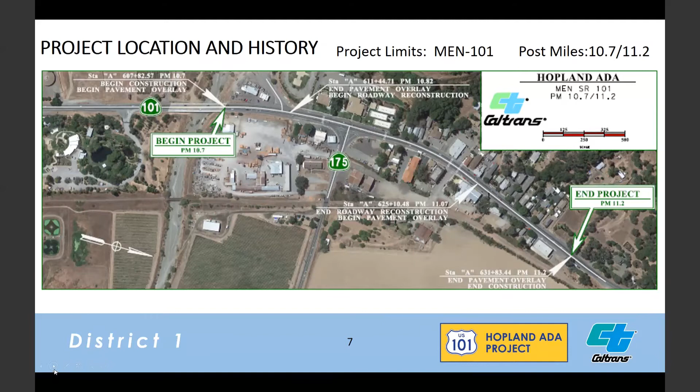The purpose and need of this project is to upgrade existing ADA pedestrian facilities to meet current standards and achieve ADA pedestrian compliance. Additionally, upgrade the following items to good condition: fair roadway pavement, aging signage, transportation management system, and drainage. Construction cost for this project is around $10.8 million.

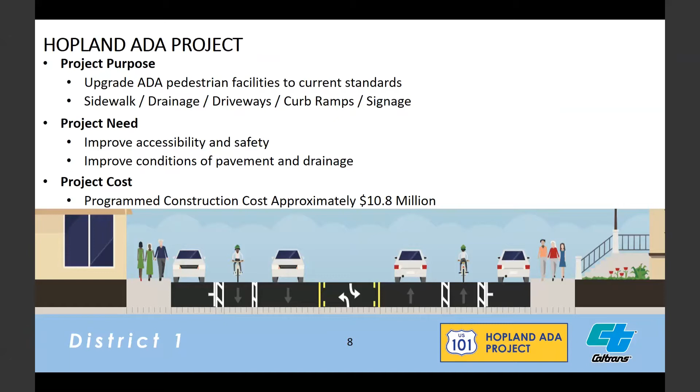And I'll hand it now to the design team. Please, George. Thank you. Hi everyone, my name is George Tokmakov. I'm the design senior with Caltrans North Region for the Hopland ADA project.

This slide shows the proposed street view of the project from Mountain House Road to First Street. As you can see, numbers 1 through 5 show: number 1, sidewalk will be 5 to 8 feet wide; number 2, parallel parking and shoulders will be 8 feet wide; number 3, bike lanes will be 5 feet wide; numbers 4 and 5, traffic lanes and the two-way left turn lane will be 11 feet wide.

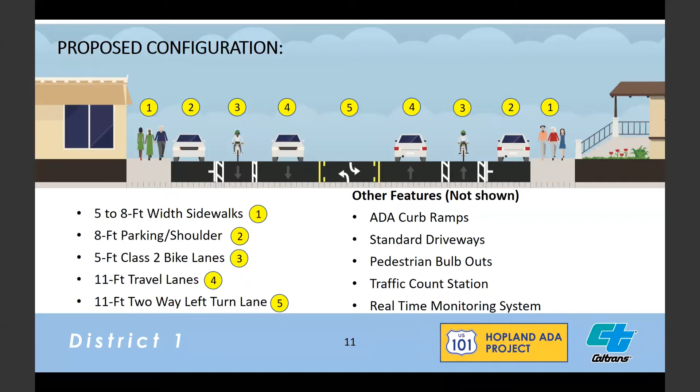The sidewalk improvements, street parallel parking, and bike lanes will help create foot traffic for businesses in the area. In addition, the following improvements will be made: ADA curb ramps, standard driveways, bulb outs, traffic count station, and real-time monitoring system.

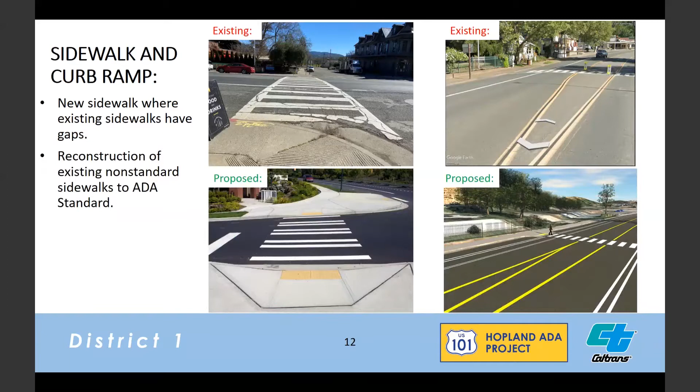Here are some photos of places in town you're very familiar with, where there are no accessible sidewalks, no curb ramps, or curb ramps that are not to standard. Here you can see a couple of renderings of standard curb ramps and crossings. The top one is the existing, and the bottom one is proposed.

Bulb outs will be designed to help shorten the distance pedestrians will have to travel to cross the streets. Bulb outs will also help drivers see pedestrians using the crosswalk so they can reduce their speed. The crosswalk slopes will be flattened and brought to ADA standards.

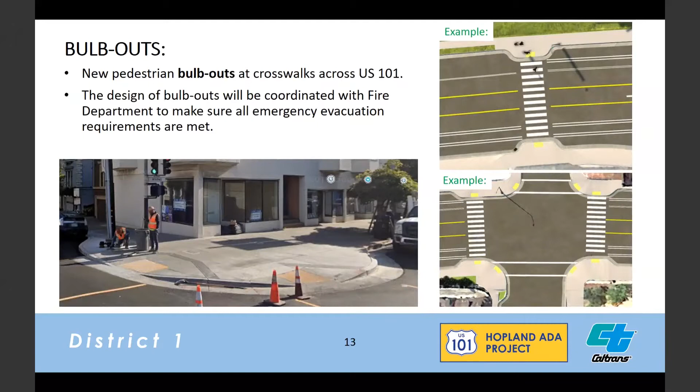Here are some shots of drainage inlets and localized flooding in Hopland downtown that need improvements. Upgrading the drainage facilities will help prevent curbside flooding. Underground culverts will be improved to provide more efficient drainage, and new inlets will allow water to be drained without causing debris blockage.

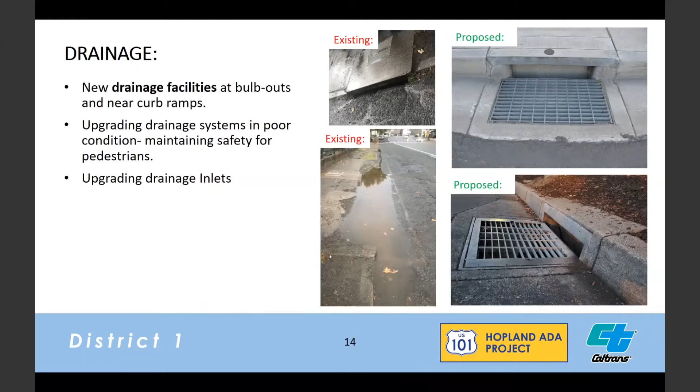Here's the construction strategy. The section identified on the map in purple shows full depth roadway reconstruction between Mountain House Road and First Street. This will include correcting the roadway profile and bank.

These corrections will improve safety at the crossing and crosswalks. The section identified on the map in yellow will have pavement overlay to provide a smooth roadway surface.

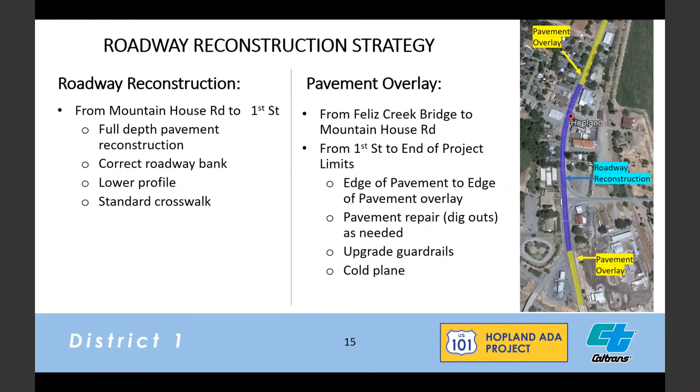Next slide. And next up is Jeff Wright from construction.

You're muted, Jeff. Sorry, I must have hit it twice. I thought I was unmuted.

Good evening, I'm Jeffrey Wright. I'm the area construction engineer for Mendocino County for Caltrans, and I'm here to present the construction portion of this presentation.

Next slide, please. During construction we anticipate various challenges, and we're proposing solutions to those challenges. Some of the challenges we've identified are community concerns regarding construction impacts to local businesses and residences.

There will be impacts to businesses and pedestrian access for businesses and local residences. We will have ADA constricted areas that we'll need to pay attention to, and the existing road grade has a steep side slope.

We will also have a restricted work sequence that will help facilitate minimal disruption to parking for the local businesses and residences. We'll have a community outreach plan and schedule coordination.

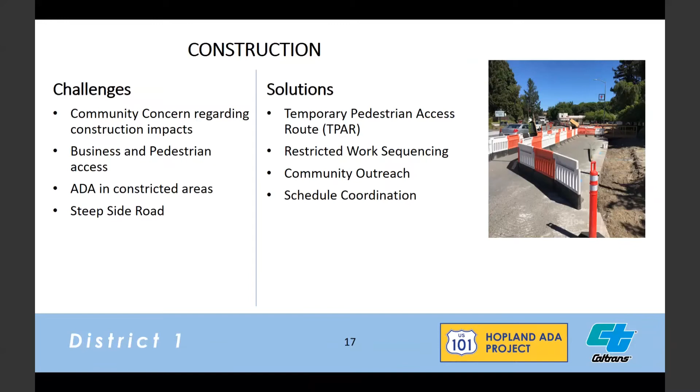Next slide, please. The estimated construction start date will be spring of 2025, as Mike mentioned earlier.

It's anticipated that the approximate duration for the project will be between 6 and 9 months of construction, although it will have the potential, if we run into unforeseen conditions, to roll over into a subsequent year.

We also anticipate there'll be traffic control throughout the life of the project consisting of various types: either reversing traffic control with flaggers, or lane reduction to facilitate traffic flowing both directions by utilizing the center turn lane as a traffic lane.

We'll have moving lane closures for striping and marker application on the final pavement lifts, and then we'll have shoulder closures and sidewalk closures to facilitate the various sidewalk and curb ramp improvements.

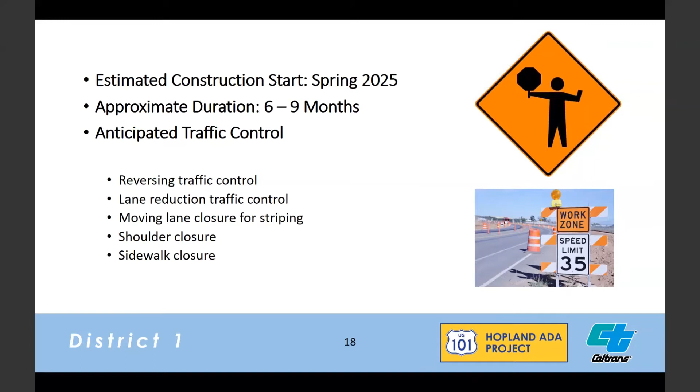Next slide, please. The temporary pedestrian access routes, as we touched on, will allow for planning of mobile access ramps. We're planning on constructing mobile access ramps to access businesses and residences while the sidewalk is removed and replaced.

As you can see in these photos from the town of Willits, we had the temporary pedestrian access routes with the white and orange barriers as shown.

And then the wooden gangplank as shown in the right photo will be a temporary access over the active work area, built from the temporary pedestrian access route to the business front or home front or walkway as required.

We will be addressing pedestrian accesses by using these types of structures, and we will also cordon off the area of active construction with these temporary pedestrian access routes to facilitate construction vehicle access for equipment and concrete trucks.

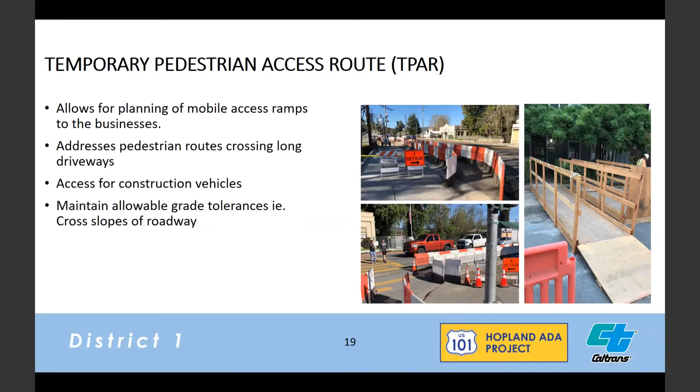We'll also maintain allowable grade tolerances for cross slopes of these facilities to comply with ADA.

Next slide, please. We will have a restricted work sequencing, and this is a hypothetical example crafted to show what we intend to do. We'll be limiting the work area of the contractor into sequences and stages, and we will have TPAR and parking for these various sections.

The project will be broken up into segments. As you can see, we've delineated different colors in 1, 2, and 3, and these would be proposed stages 1, 2, and 3 to progress through town.

We would allow the contractor to work on 2 sidewalks that are adjacent for efficiency of their construction, and catty corner as shown in red. Then we would skip a block as shown in blue and green, or 1 or 2 blocks depending upon the side of the street.

And then we would allow another catty corner block to be constructed. This would be done in sequencing, so they would do all the red first, then all the blue next, and all the green after that. The contractor schedule would dictate how many consecutive blocks they have open.

The intent is to limit the disruption to the public and the businesses by allowing parking to occur in the unworked-on blocks, and hopefully only have a block or two maximum walking distance to get to the respective businesses that are impacted by the active construction.

We will avoid working in adjacent segments, and we'll have advanced coordination from the field team to the local business owners and residents.

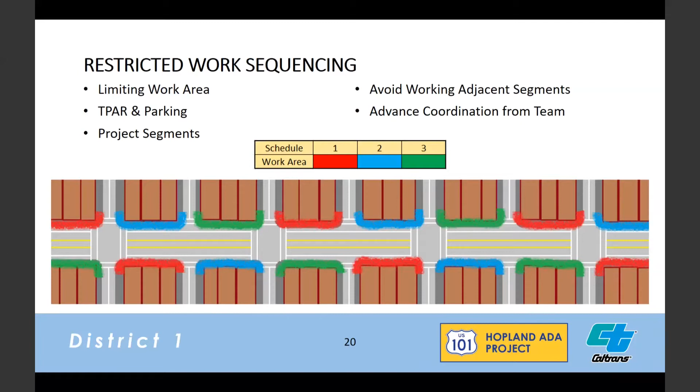We will also try to improve communication with the community by having a community outreach plan. We know that we will have a pre-construction open house meeting where we'll put all the plans on the walls so the community can come and see what the proposed improvements are and ask questions of the Caltrans team, so they can have a better understanding of what we're doing at each individual location in town. Throughout the life of the project, we'll have social media updates and flyers posted around town to try to give increased communication with the community.

We'll also have an advanced notification system where a member of the Caltrans team and contractor's team will contact local businesses 48 hours in advance. We'll work with scheduling and conveying that to the public. In advance of the project, we'll have right-of-way coordination for the affected properties and businesses that will have sidewalk built in front of their facility.

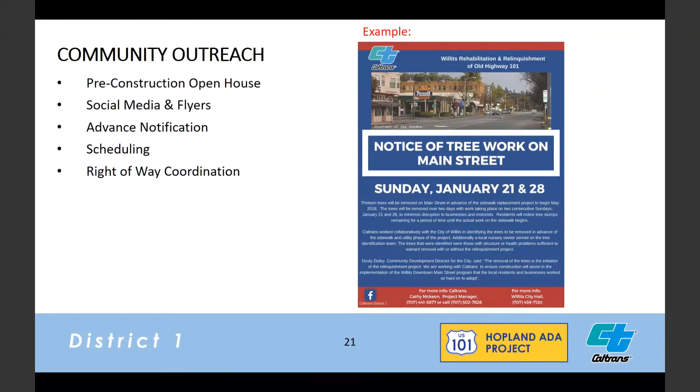As mentioned, we will have schedule coordination and provide advance notification to affected businesses and residences. We will have door-to-door notification and outreach from the Caltrans lead inspector and the contractor's foreman. The intent is to have them visit each individual residence and business a minimum of 48 hours in advance of the work occurring in front of their business.

We will endeavor to develop interpersonal relationships and accountability between the Caltrans and contractor's team and the local business owners and residence owners. We'll also have a 24-hour contact telephone number where you can leave a message with any concerns or questions you may have. And we will try to post ongoing 3-week schedule updates via social media or other formats to keep people apprised of what the upcoming work will be.

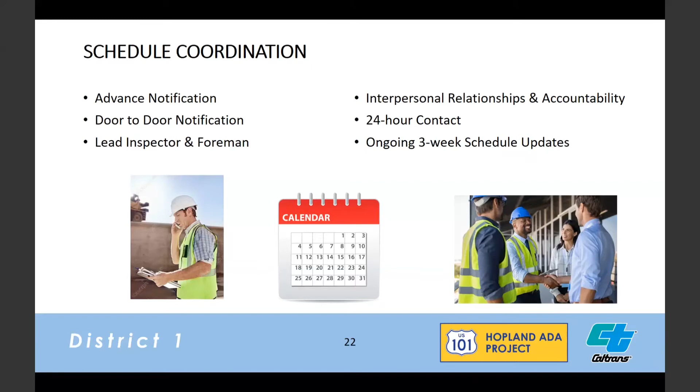We know that emergency evacuation and traffic safety is of paramount importance to Caltrans and to the community. So as part of the contract, we will work with the contractors and local emergency services to develop an emergency evacuation plan, coordinated so that in the event we have active traffic control going on when an emergency occurs, we will know how to respond and open up the highway just as soon as feasible.

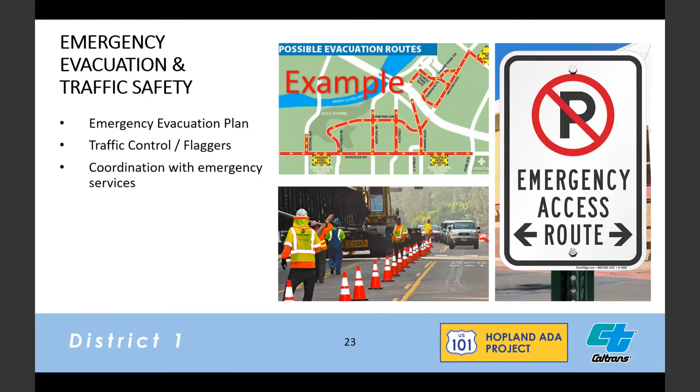We will educate traffic control and flaggers that if there's an emergency vehicle coming into the queue, it will have priority, and they'll stop all other traffic to facilitate the passage of those emergency vehicles. We'll have advanced coordination with all the individual emergency services, whether it be fire department, sheriff's office, or medical ambulance services, etc.

Next, I'll pass the presentation off to Julie Price, the environmental coordinator for the project. Thank you.

We've prepared a draft environmental document and circulated it for public comment. The comment period ends on May 4th, and at that point we will review the comments received along with any additional information, and prepare a final environmental document. We anticipate the final environmental document will be approved by the end of June. After that, the project can move on to other phases and ultimately to construction. Environmental involvement continues during construction, where we monitor construction activities for compliance with the environmental measures that are part of the project.

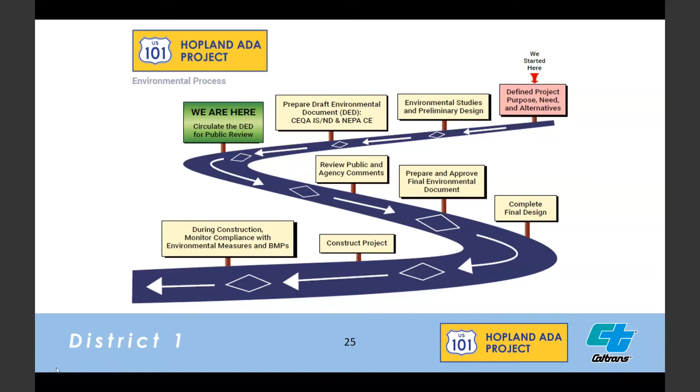In accordance with the California Environmental Quality Act, CEQA, and the National Environmental Policy Act, NEPA, the project needs to go through an environmental review process to evaluate potential impacts to the environment. The analysis of these impacts is included in the environmental document; it is, in fact, the core of that document. Under CEQA, the type of document prepared for this project is an initial study with negative declaration. Under NEPA, the project qualifies for a categorical exclusion.

The CEQA, or state environmental review process, for the Hopland ADA project has found that the project would have no significant impacts on the environment, and therefore no mitigation is required. The NEPA, or federal review process, will be completed at the time of the final environmental document.

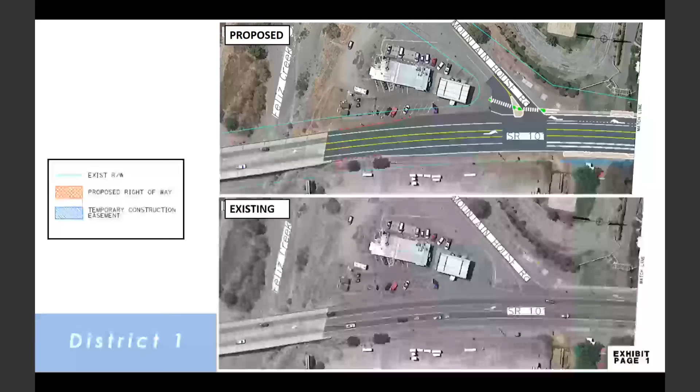Right, yeah, we're at the Hopland Tap, so a lot of people pull down Center Street and park behind the building and come in the back way. So I'm kind of wondering what the impact on Center Street is, or will that be part of the repavement project?

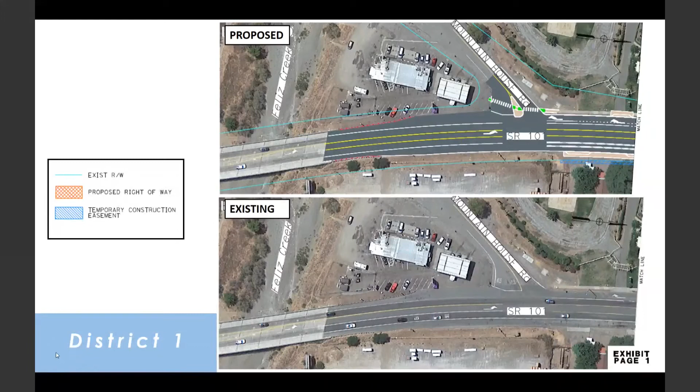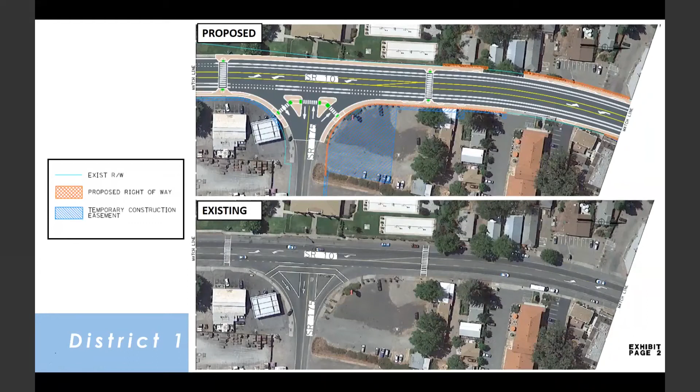So as part of the project, all of the pavement through town from Feliz Creek Bridge to just north of First Street will be paved at some point throughout the project. Right now we're still in the staging development part of the project, and then the contractor will have their own spin as to what they address first, whether they do all the sidewalk work first, all the pavement work first, or some combination thereof.

But at some point, Center Street will have some intermittent obstructions to allow the paving to occur. We will have temporary pedestrian accesses in front of your building while we are doing the sidewalk, curb ramp, and bulb-out improvements in those areas, so parking while we're actively working on that sidewalk section in front of your business will be impacted to facilitate construction.

But as we tried to talk about in a hypothetical example earlier, hopefully the adjacent block on either side will not be worked on at the same time as the block in front of your building. So they'll be able to park hopefully no more than a block away and walk back to your business, utilizing the temporary pedestrian access route and the gangplank as may or may not be appropriate for your situation to access your business front.

Any parking you have in the back of your building should be able to be maintained, because Center Street will be open for the majority of the construction, but there will be some necessary temporary closures while the paving goes on, for the duration of the paving activity, until that pavement is cool.

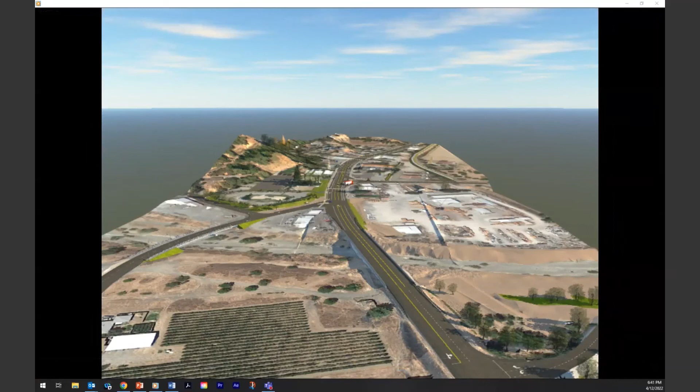Hi everyone, my name is Shaq. I'm the lead designer for this project.

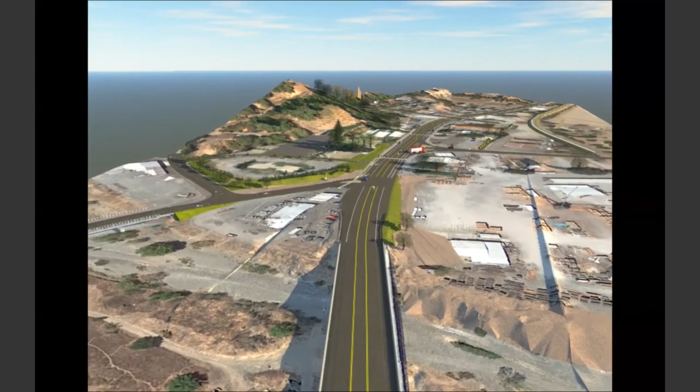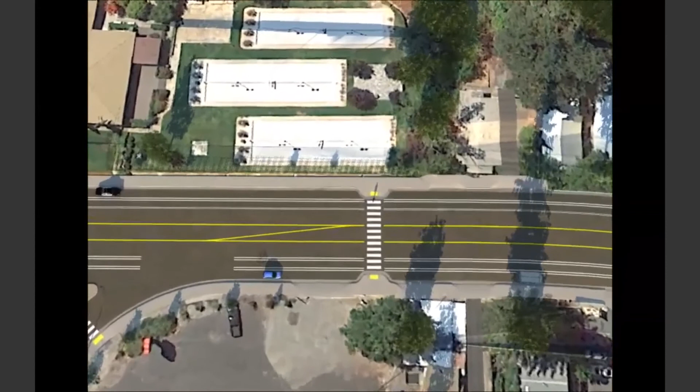This is a fly-through view of the project. It shows right at the mountain house where we are proposing to have some type of island to reduce the crosswalk distance. This area shows the 175 intersection. We are proposing to install an island to reduce the crosswalk distance. We also installed a bulb out to reduce the distance.

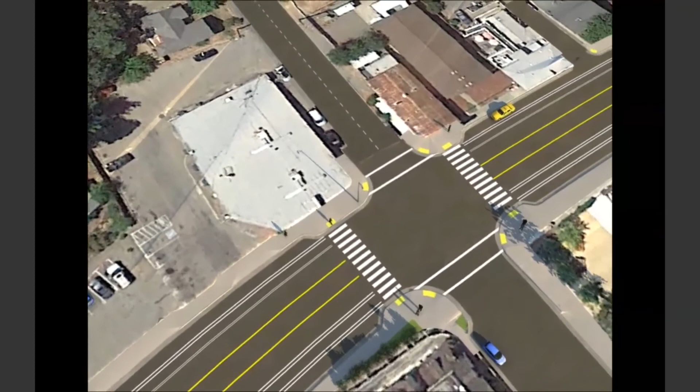This is the area where we have the 175 intersection. Throughout this portion would be more the overlay portion of the project. However, we are making the sidewalk ADA compliant, so we will work on the sidewalk in that stretch.

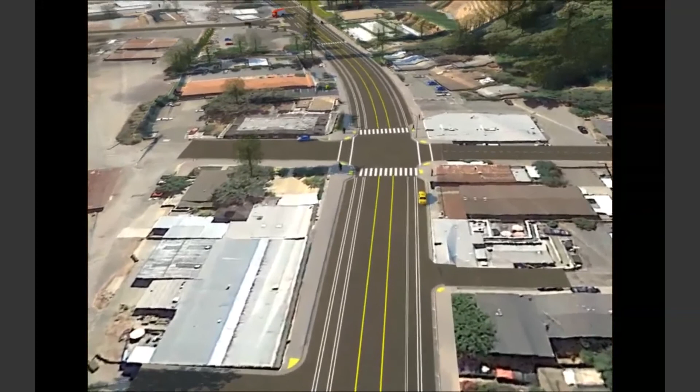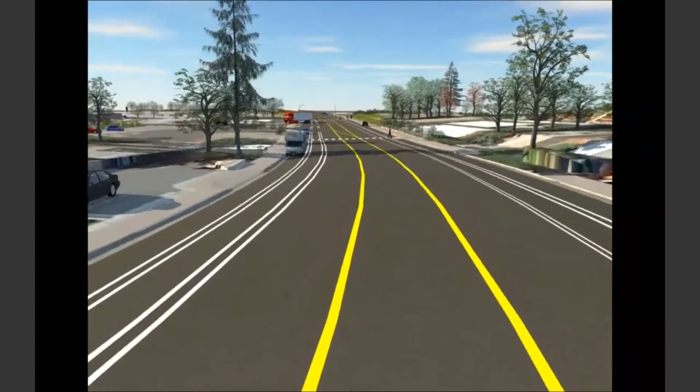This area just shows the cross slope on the main line. It would be a 5% tilt toward the east side, so it would be a full 5% on one side. Again, we are installing a bulb out to reduce the crosswalk distance.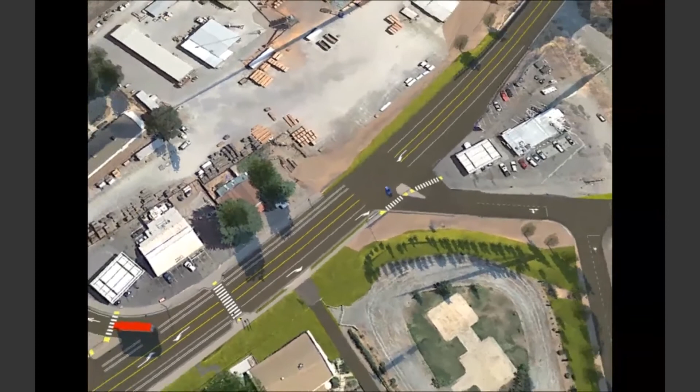During this phase, we will also address some of the issues with the existing drainage system. For example, some of the existing culverts are of the oldest standard, which is like a 12-inch pipe. But when we replace those, we will bring them to an 18-inch pipe to convey the water with better efficiency.